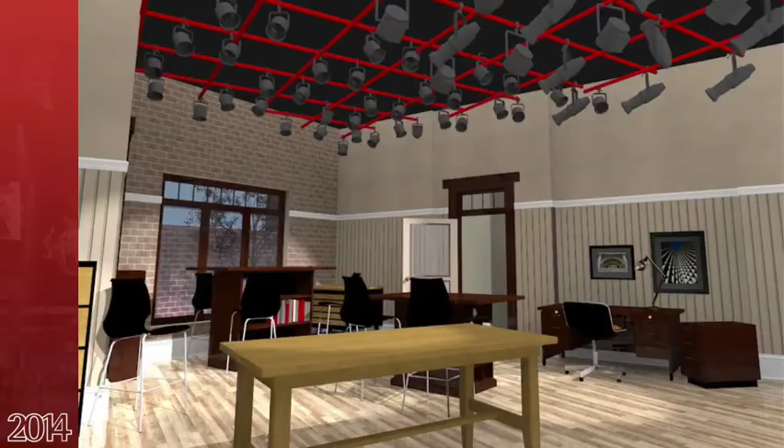In previous versions of Spotlight, any geometry could be converted to a lighting position, and it still can, of course. But now, in 2014, creating lighting pipes and ladders has never been easier.

The new tool for lighting pipe objects streamlines the process of creating lighting position pipes that can not only be customized for 2D and 3D graphic attributes, but also for center spacing, origin, and snapping. You'll also create custom spaced tick marks or loci along the lengths of the pipe.

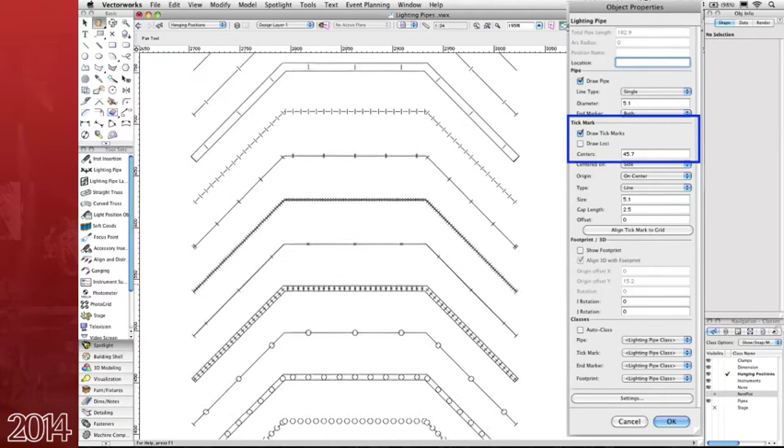Along with the lighting pipe object, we've also included the lighting pipe ladder tool. This tool lets you create vertical boom positions and ladders that can also be customized with rung spacing and 2D graphics. This new tool will help you spend less time custom modeling and more time designing.

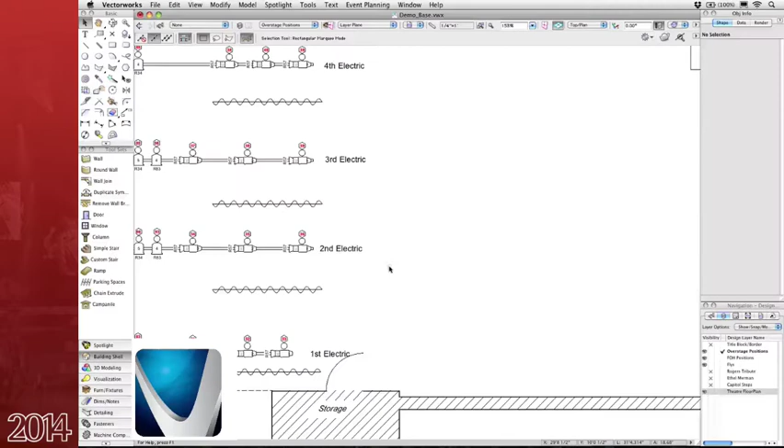In the past, hardwired instrument summaries were associated to individual lighting positions. Also, the instrument key had no ordering or format options and little control over the information displayed.

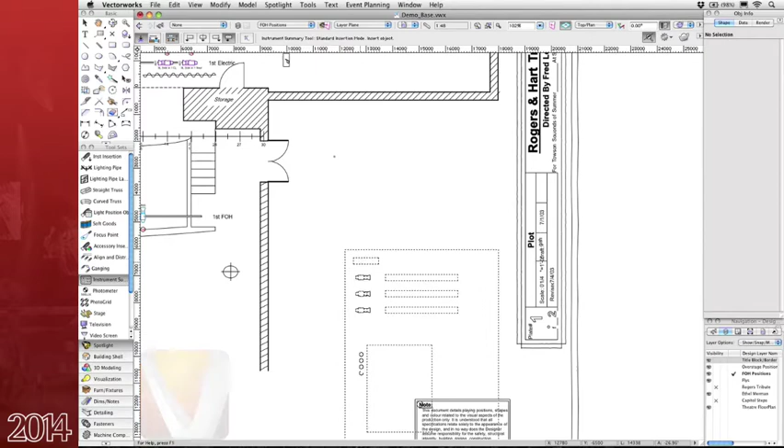The new instrument summary tool gives you easy access to information for either your lighting instruments or positions to create highly customized instrument key and position summaries.

You can customize your summaries through the comprehensive build list, adding only the necessary information. You can then customize the appearance of your summaries through the Object Info palette.

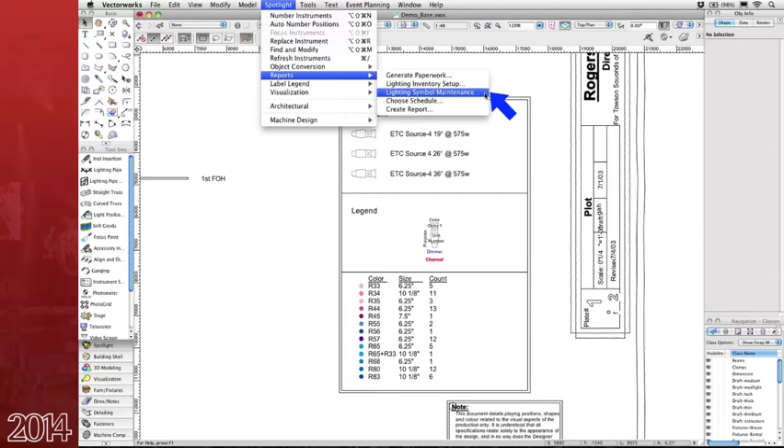In addition to the Instrument Summary tool, we've also introduced a new Lighting Symbol Maintenance function. Running this command lets you view all objects with lighting information record attached that are in your current document. You have the ability to view, edit, and replace records attached to lighting objects in one easy dialog. Your lighting inventory and light plot setup has never been easier.

The lighting device object has received a boost with features that are sure to make your workflow more efficient. For starters, a new option allows you to draw beam vertically, so you can see the full height of the beam clearly at a focus point.

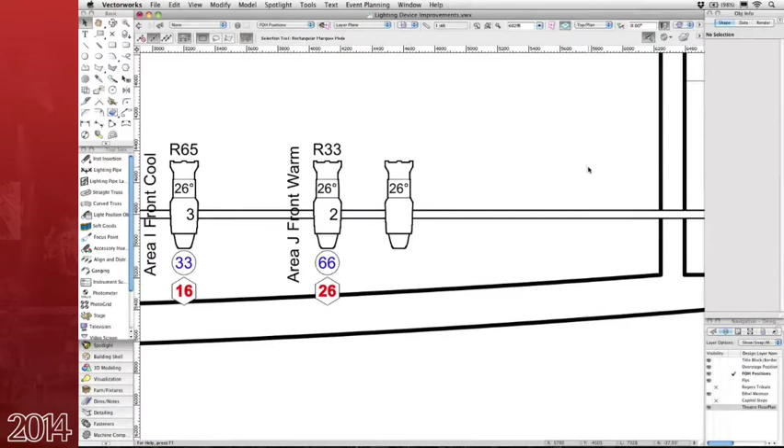You also now have the ability to add additional default records to lighting device symbols through the Spotlight Preferences dialog box—anything you want. Plus, it's no longer necessary to carefully type in the name of the desired label legend in order to assign it to an instrument. You can now select label legends from a drop-down list displaying all the legends in the current file.

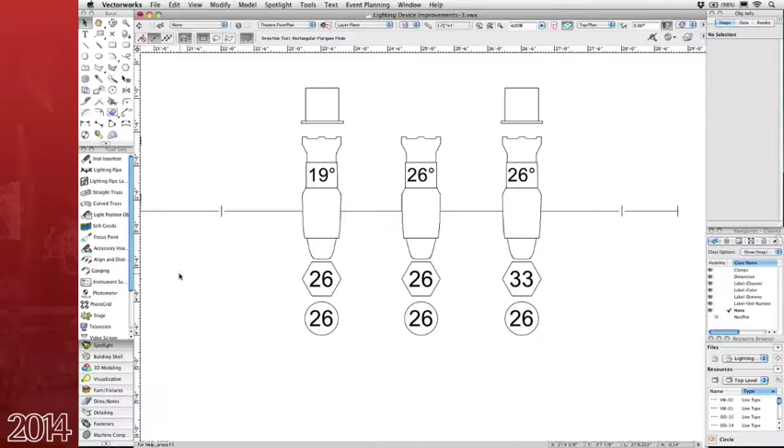And next we have a twofer by dimmer and channel. With dimmer per circuit offered in many venues, more people choose to twofer by both dimmer and channel. So now the ganging tool can twofer by both the dimmer and channel, so these twofered lighting devices stay synced even if you only change one.

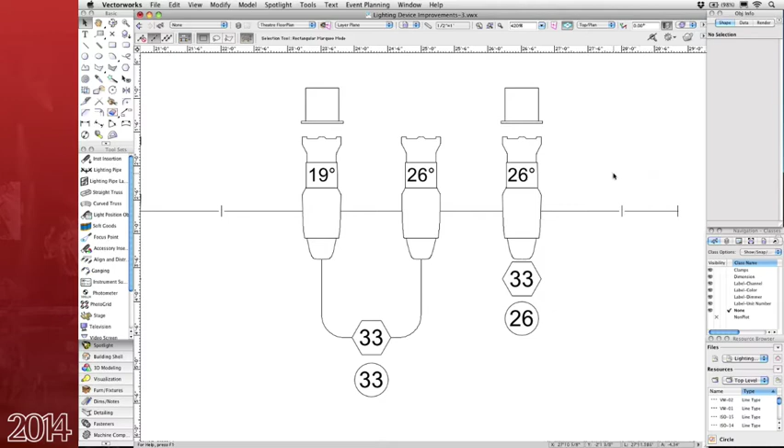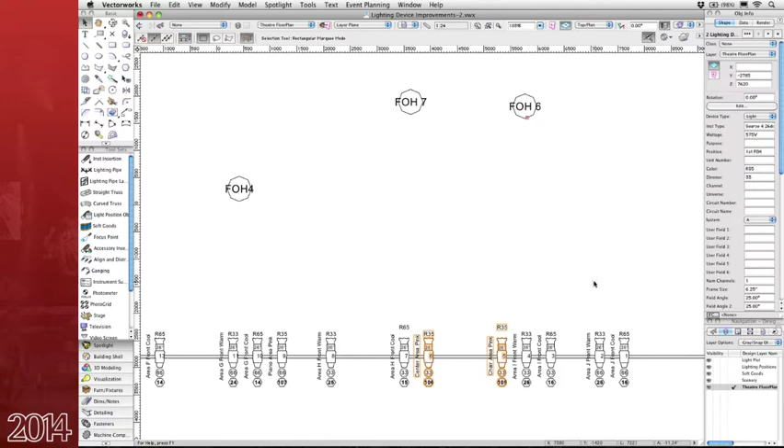Along with the overall improvements to our lighting device object, we've also included the ability to select all lighting devices associated with a focus point. Simply right-click on the focus point and select Focus Lighting Devices. You can now easily adjust common settings, such as the draw beam, all at once for multiple devices.

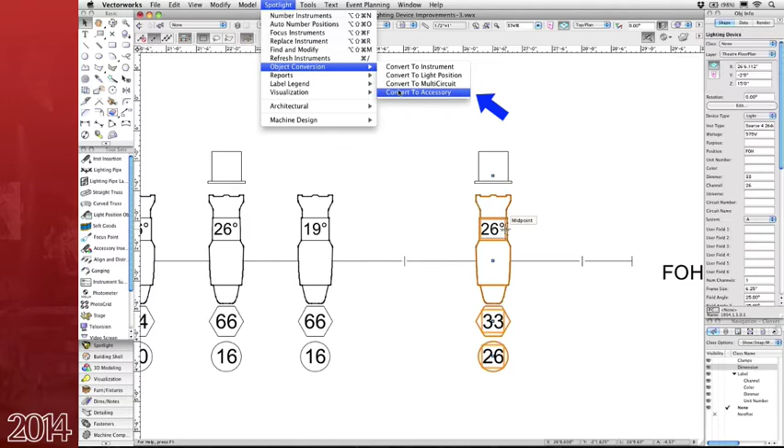If you've ever forgotten to associate an accessory with a lighting instrument while placing it in your model, you'll appreciate this new feature. You can now select the accessory symbol as well as the lighting device and then convert the selection to an accessory. You can use the same command to change the association of an accessory from one lighting device to another. Just like that.

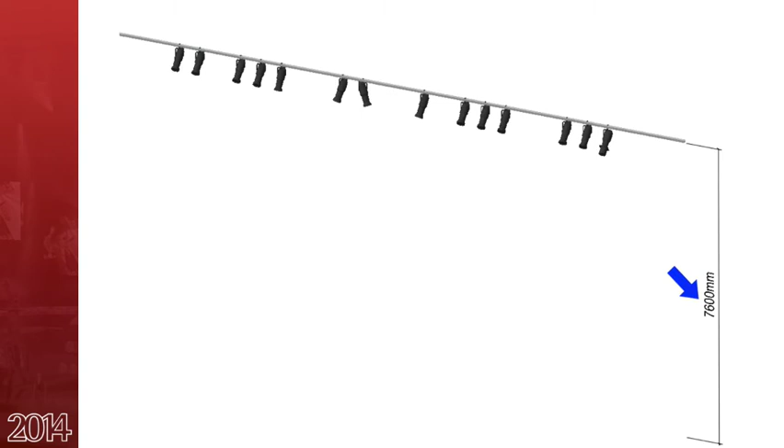Another improvement that can help enhance your modeling workflow is the ability for 3D geometry converted into lighting positions to retain their proper Z height. This means you set your lighting position trims before or after the geometry is converted into a lighting position, whatever works for you.

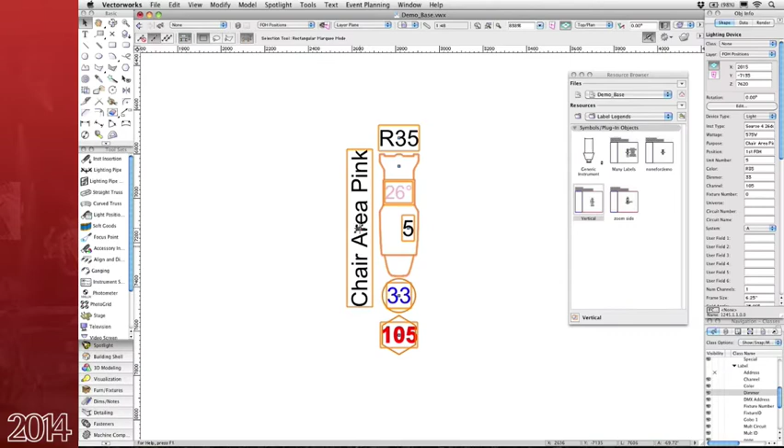We greatly enhanced the Label Legend tool to create a far better user experience. For example, you can now create a brand new label legend from a lighting device that has a label legend that you've just customized. Just choose Create Label Legend from Lighting Device. You can then name the label legend and it'll be placed among the other legends in the document with your changes intact.

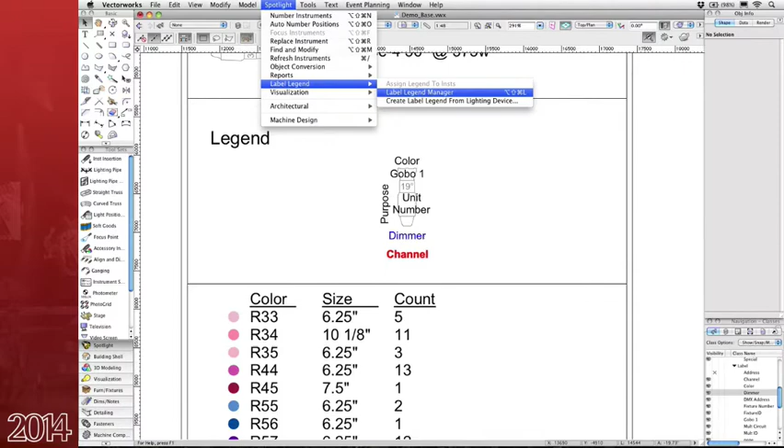To further make customization of your label legend easy, we've included a quick way to replace the lighting device reference symbol for the key to instrumentation graphic. This will save several steps through the Label Legend Manager each time.

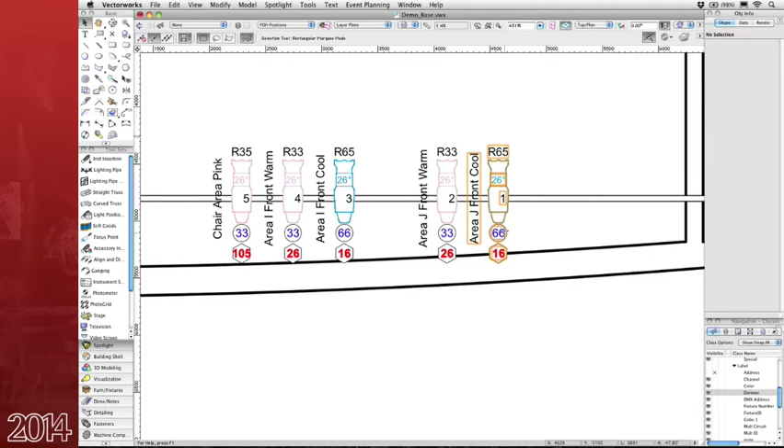This feature lets you locate Label Legend in Resource Browser. You can now right-click on your light device and select Locate Label Legend in Resource Browser. So rather than spending time locating the appropriate label legend, this feature will find it for you in the Resource Browser. I think you'll find these new features make the Label Legend tool far more efficient and easy to use.

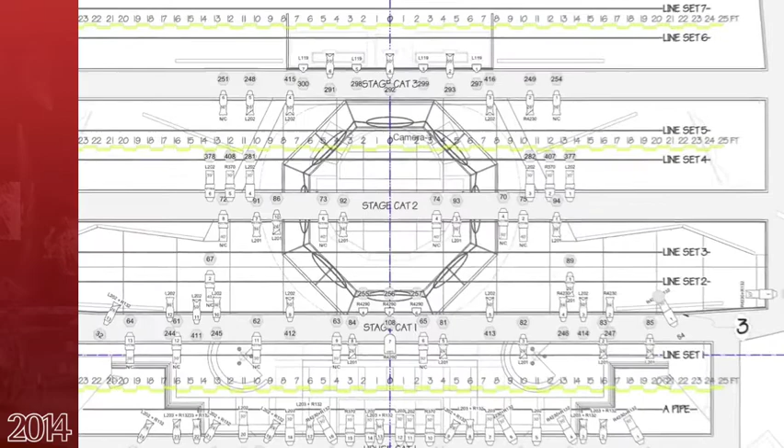Seating layouts are a powerful tool for rapidly creating and arranging banquet, classroom, or theater-style seating. A few small enhancements make this tool even faster.

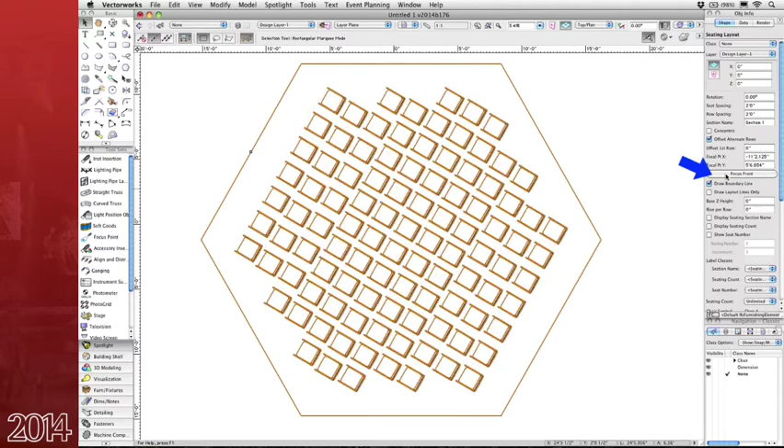When using the Create Event Seating command, you'll now be asked if you'd like to set the focal point of the seating layout as part of the creation process. You'll also notice that we've added a button to the seating layout options in the Object Info palette named Focus Front. This option points the seats to each face of the seating polygon in succession.

And now here's something to get excited about. For 2014, OpenGL has experienced a number of improvements and will no doubt become your direct modeling rendering mode of choice. This feature isn't really a single new object or tool, rather it's more of a collection of changes that'll let you remain in 3D OpenGL views during modeling and drafting. Let's take a look at some of the improvements.

First, notice how when you select an object, you get an entire bounding box surrounding the object, not just a rectangular shape.

Next, once you've selected an object and move it, notice how the entire scene does not need to be re-rendered, only the object that was relocated.

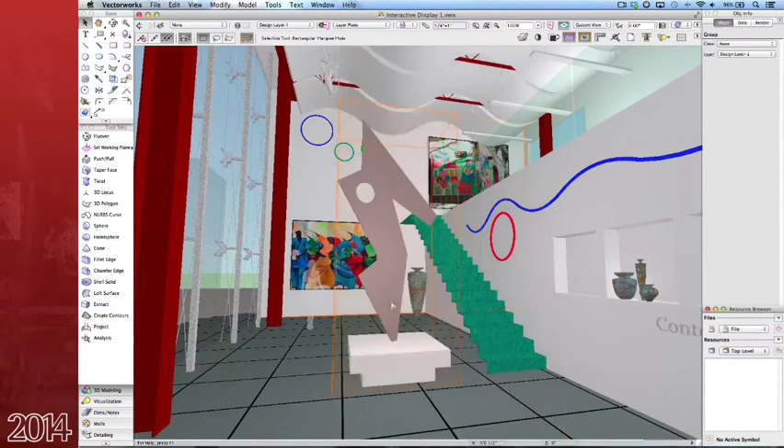Thanks to our new occlusion control, you'll no longer accidentally snap to corner vertices beyond an object. Notice how I can select an object from anywhere within the selection box and not just by the edge.

If you have Renderworks, let's look at OpenGL when Use Shadows has been selected. You can see how the shadows are more accurate and are more fluid as they move across the model.

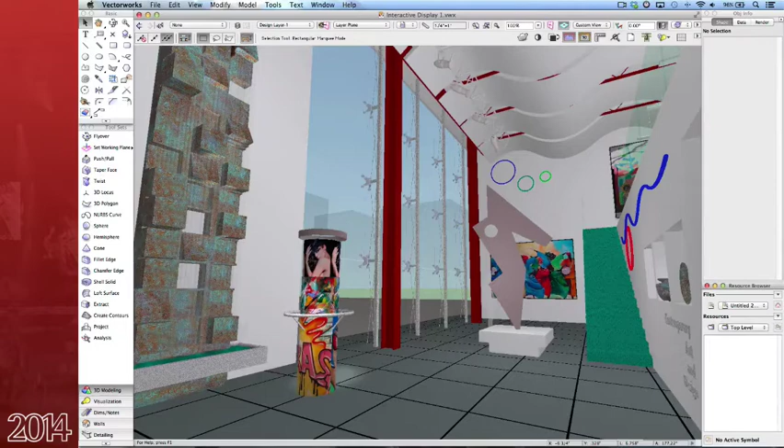Here we'll switch from one layer to another while the layer control is set to gray others. Once again, notice how the rendering mode stays in OpenGL with no need to go to wireframe.

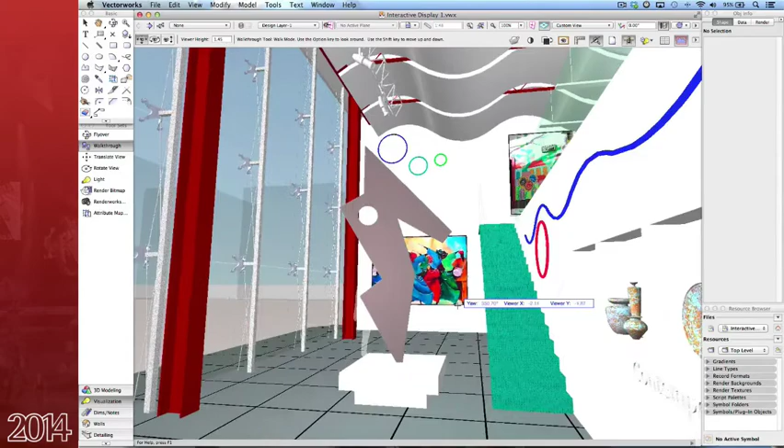In this segment, the image has been rendered in a rendering style other than OpenGL. However, once the walkthrough tool has been chosen, the rendering mode changes and stays in OpenGL and does not revert to wireframe, resulting in accurate and clear indications of what you're seeing and doing.

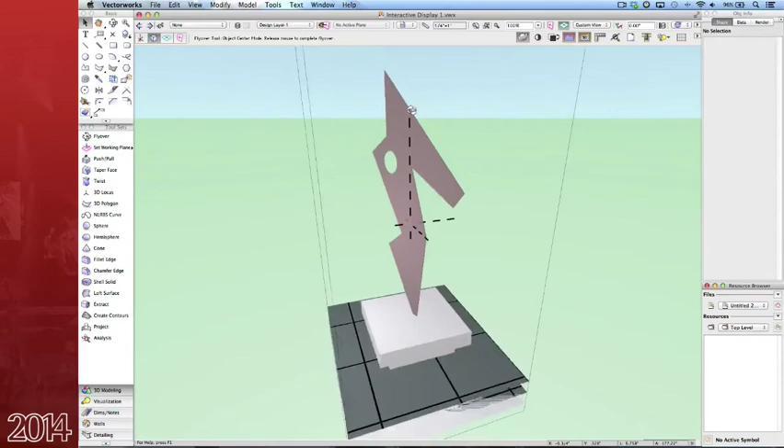And just to reinforce that, we'll use the Flyover tool and change the viewing angle of this element. Notice how the view stays in OpenGL. Once again, no more reverting to wireframe.

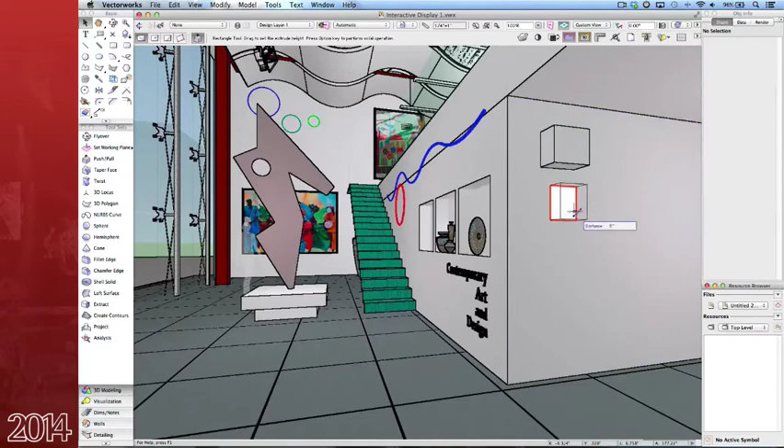And in this segment, we'll take a look at how objects appear when the Draw Edges option is chosen. Oh yeah, much cleaner and much smoother. I like that. I'd also like to add one more important benefit: with this graphic improvement, direct modeling is not only fun, but all the operations are smooth and accurate.

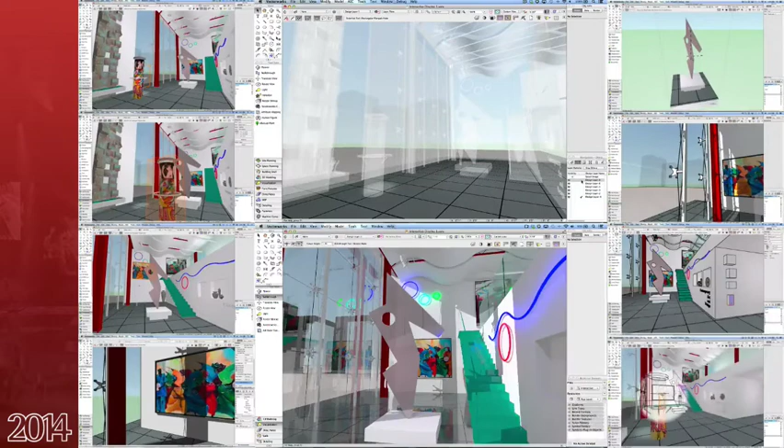And finally, to wrap up, check out the new functionality of the X-ray select mode. We'll use the B key to explore wireframe skeletons while navigating in OpenGL. And before I close this segment, don't forget to navigate using one of these good-looking gadgets. It just works.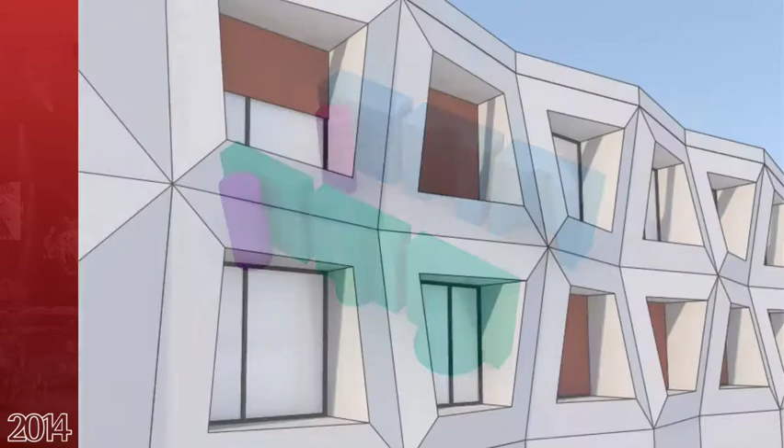In a continuing effort to help you embrace the concept of designing in 3D, we now have a couple of new additions to the direct modeling family of tools. The first, Taper Face. Let's start with a simple cube, and from the 3D modeling toolset, we'll select Taper Face.

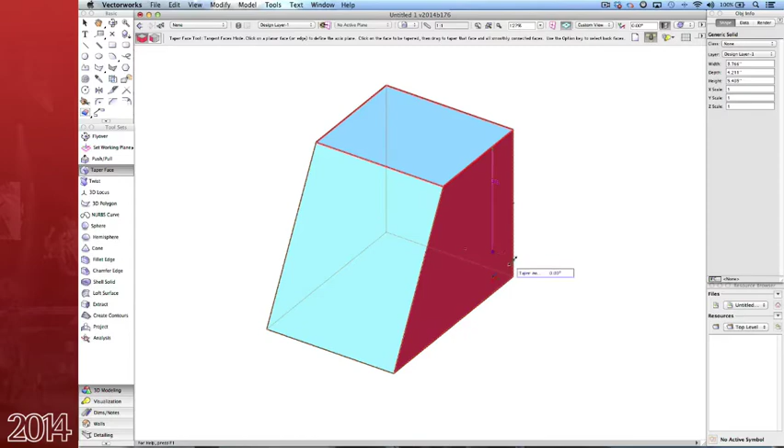First, we'll select a planar face as the base reference. Then, select the face you want to modify. The new widget will preview the direction. Then simply drag and release. For a precise angle, you can input values into the heads-up display.

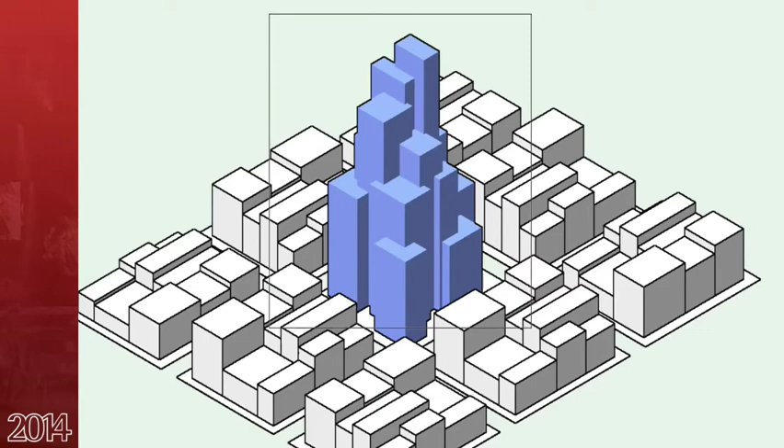Taper Face can be used to widen the base of solids and make tops narrow, and lets you get very creative when modifying solid subtractions. In its simplest form, the tool will help you explore new design ideas by deforming solid objects.

Let's take a look at this massing model and explore some design alternatives. With the Tangent Faces mode, you can quickly and directly pitch all the rooftops and explore different design alternatives for this building, something not easily accomplished previously.

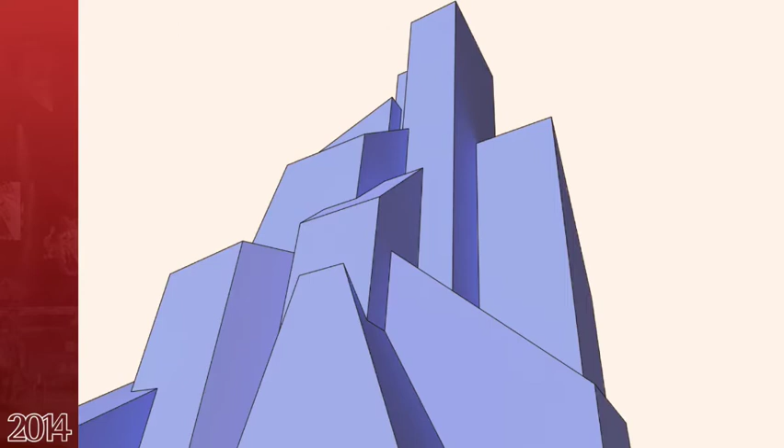Continuing in the same vein of direct modeling, we have a twist for you, the Twist Face tool. Many examples exist in the landscape and in entertainment and lighting design, as well as architecture.

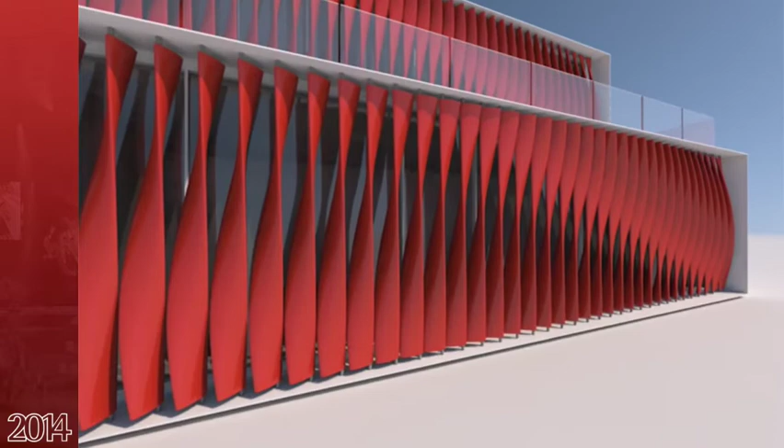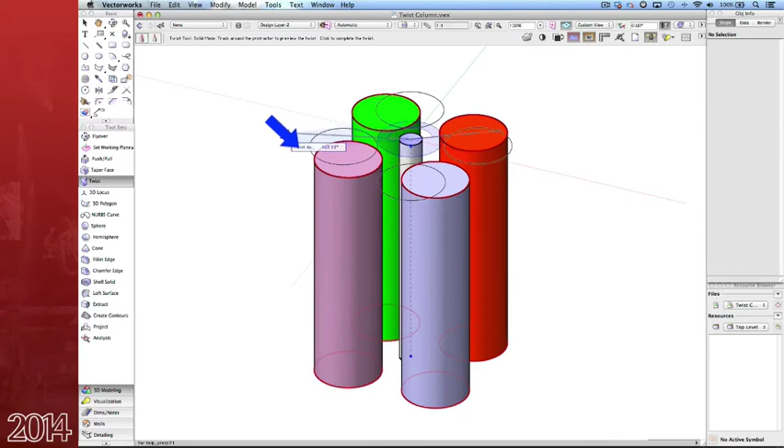Starting with a solid object, it's simply a matter of selecting a base reference face and then letting the protractor widget give you visual clues regarding the amount of twist placed on an object. You can also twist multiple objects. Notice the heads-up display giving you the opportunity to input a specific number of degrees of twist.

So now, go get wrapped up in your work. This is truly direct modeling taken to the next level.

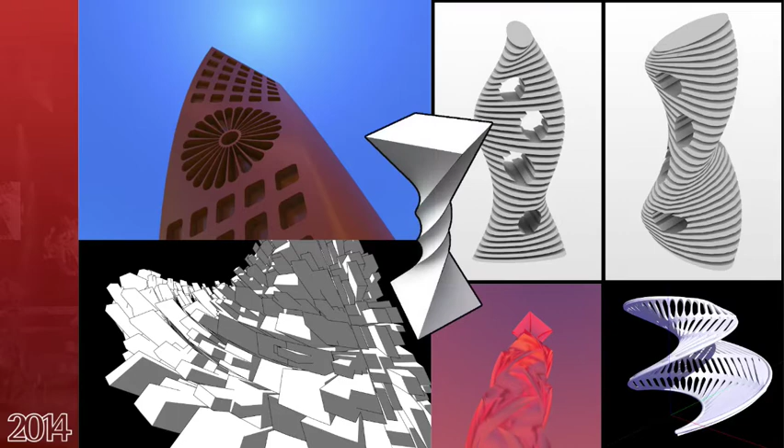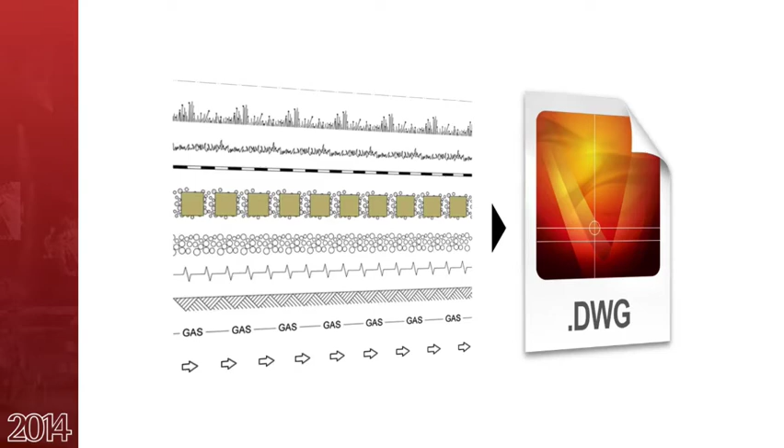The next feature involves complex line type export. Last year in Vectorworks 2013, we introduced line types. Now in Vectorworks 2014, these line types can be exported to DWG format as true DXF DWG line types.

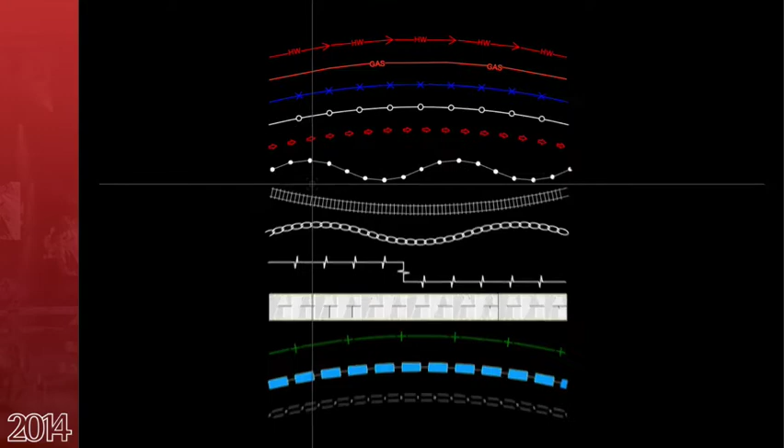Simply uncheck complex line types as blocks in the DWG export dialog to ensure this feature. With that box unchecked, Vectorworks will create the appropriate SHX files that will be placed alongside the DWG after the export completes.

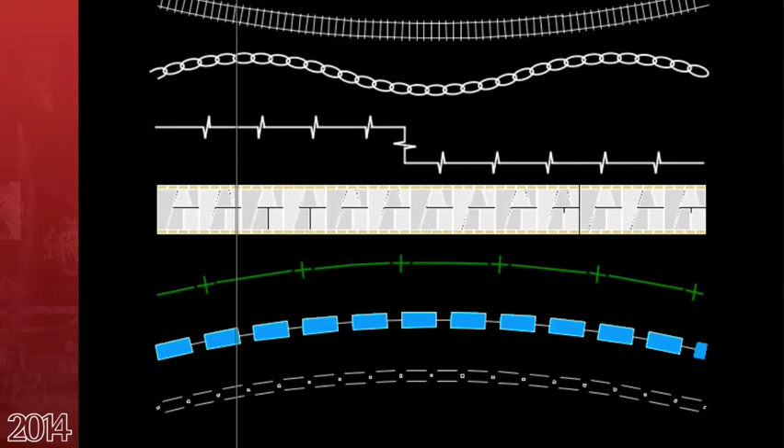The next feature is support for named true colors. Vectorworks 2014 now includes support for named true colors in both the import and export of DWG files. Any named colors included in the DWG during import will be imported as named Vectorworks colors. This will occur automatically for imports.

On the export side, checking the box for Use True Colors must be checked in order for these types of colors to be exported properly.

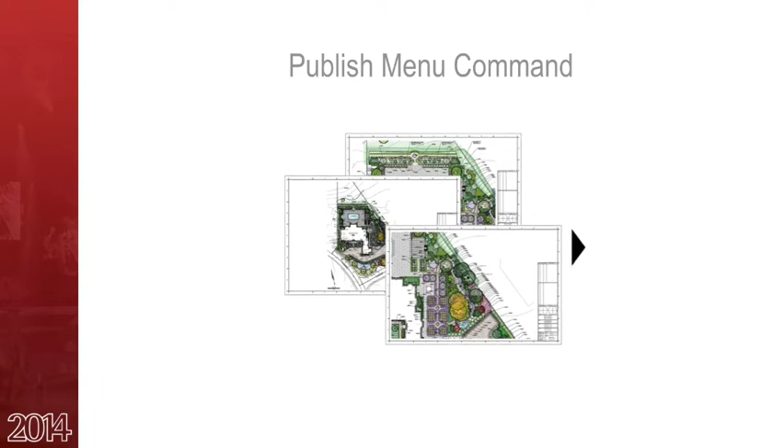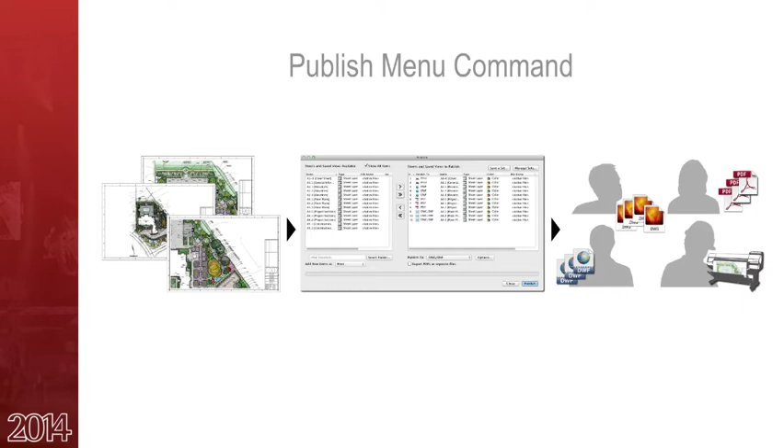The next item is the Publish command. In the final stages of a project, no matter what your profession, you'll need to publish drawing sets for your project's various stakeholders and collaborators. Therefore, we've created the new Publish command. This new option will let you produce customized file sets in a number of common formats right from a single dialog box.

When using the Publish command, you can pick and choose one or more sheets, saved views, or even other Vectorworks files, as well as the export formats including PDF, DWG, DWF, and print. This means that from a single location you can set up and even save a set of files to be produced, then click OK and go on about your business as Vectorworks produces all the necessary files to your specified location.

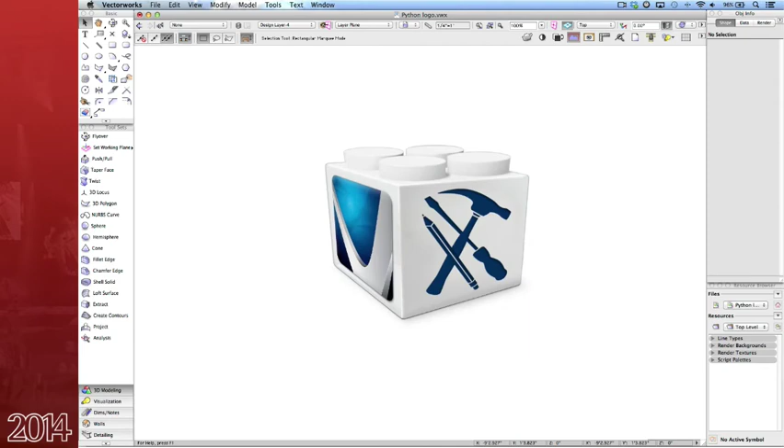Scripting with Vectorworks' embedded VectorScript programming language is a feature some of our users have employed to create custom plugins. However, in an effort to offer a broader world of custom scripting, you can now utilize the Python 3 scripting language and its thousands of libraries to efficiently develop scripts for Vectorworks. Python is known as a modern and popular scripting language with a large base of students, academics, and professionals around the world who learn how to program with this easily accessible open source code.

Imagine if you could develop research projects in your school, develop tools that take advantage of operating system settings, connect your georeferenced drawings to web map services, push the boundaries of your workflows by incorporating online resources, dynamically connect IFC data to your building information models from the cloud, execute automatic tasks such as email notifications, or create your own customized tools and commands. The possibilities are limitless.

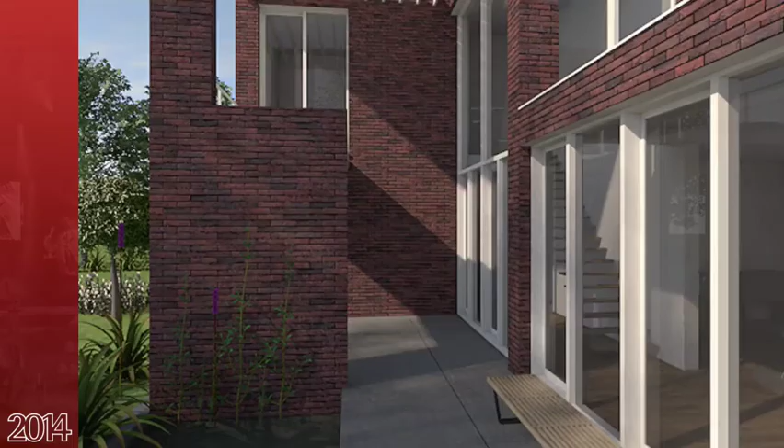Here's a new tool that's been added to RenderWorks' repertoire. The Brick Shader lets you create a realistic representation of bricks, panels, or tiles as a texture. While this feature existed in previous versions, you're now able to add a secondary brick texture, as well as control when and where it appears, separate from the main texture.

Not only that, but you now have complete control over the size and appearance of what would be the grout lines. You can select either a combination of colors or a texture for the fill. Whether you alternate row and column styles or apply a more randomized look, you'll gain hours of time in your workflow because now you don't have to tediously model each and every brick.

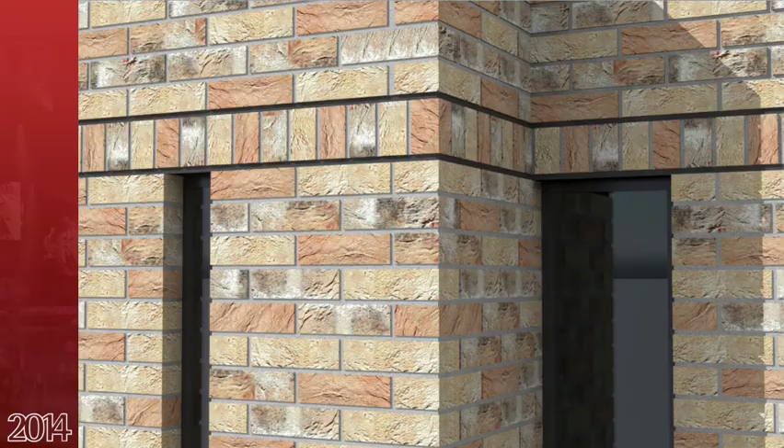This change also means you can take a picture of bricks that already exist in the real world and then create a much more realistic brick texture that'll match an existing wall. Finally, here's an example of many of the brick and masonry textures that ship with RenderWorks 2014. So enjoy!

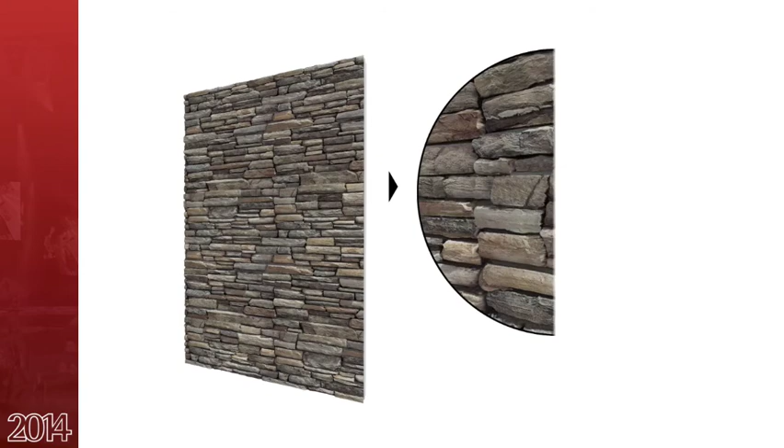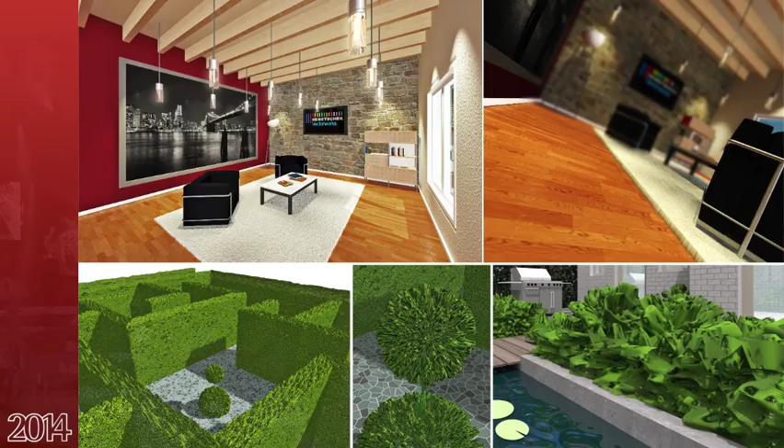It's now possible to apply a displacement map in addition to a simple bump map to a RenderWorks texture. While at first this may appear to be the same as a regular bump map, displacement mapping actually alters the existing geometry to create a more realistic surface effect. This is most obvious where you can see the displacement map is capable of creating geometry that casts shadows even upon itself, allowing you to create very detailed textures that can be applied to a wide range of objects.

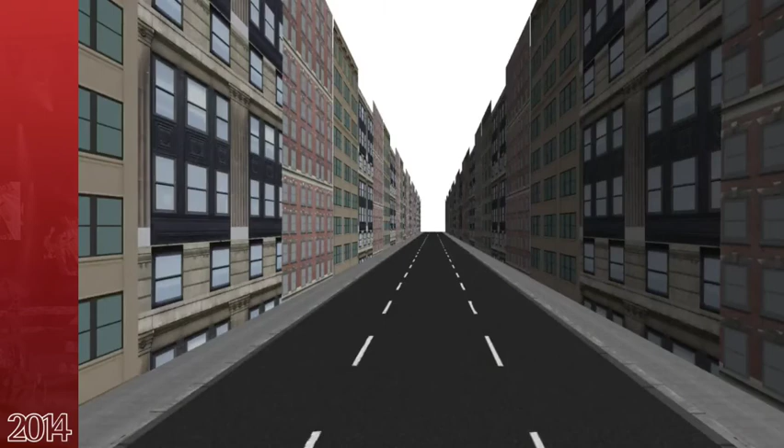This type of shader can greatly improve the overall look of renderings that contain tiles, bricks, water, and more. Not only can displacement textures emulate different materials and surfaces, but entire city blocks as well, all while keeping base geometry to a minimum.

And let's not forget to have a look at what's new for our Vectorworks Service Select members. To start, in many cases you'll find that there's no need to create 3D models from scratch. We have new content for you, from several varieties of wall sections and details that you can use and modify, to several new architectural textures, to many more types and styles of furniture.

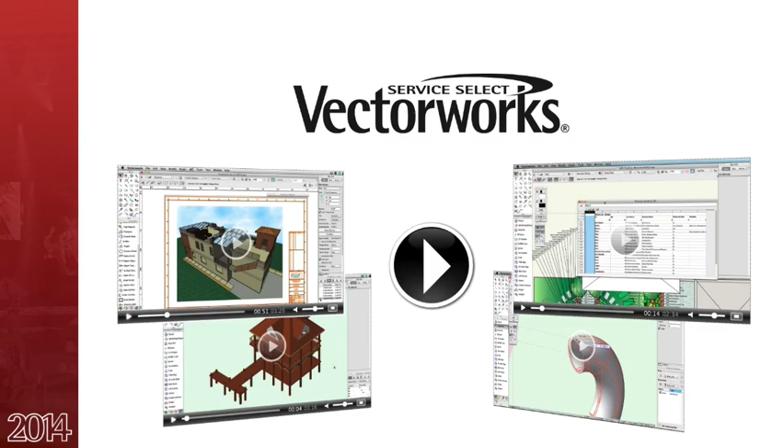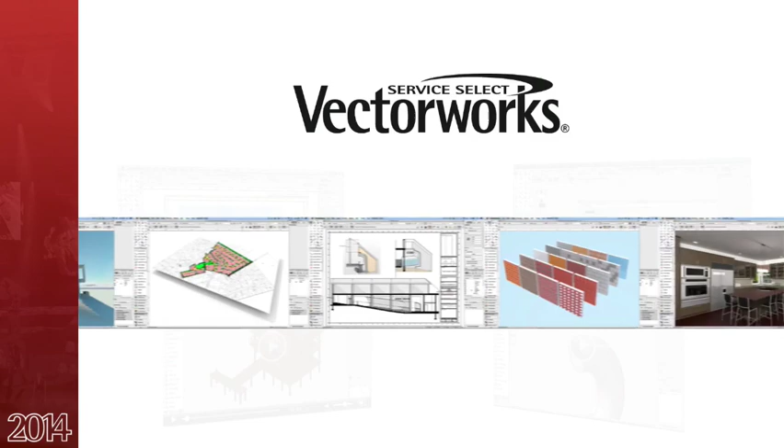Check it out. We've also included a number of video clips, including some really informative tutorials and tips and tricks, focusing on items like drawing organization, georeferencing, lighting techniques, the issue manager, worksheets, custom title blocks, and more. So come on over and see what's new.

So for this year, we invite you to capture that perfect balance between design and technology with Vectorworks 2014.